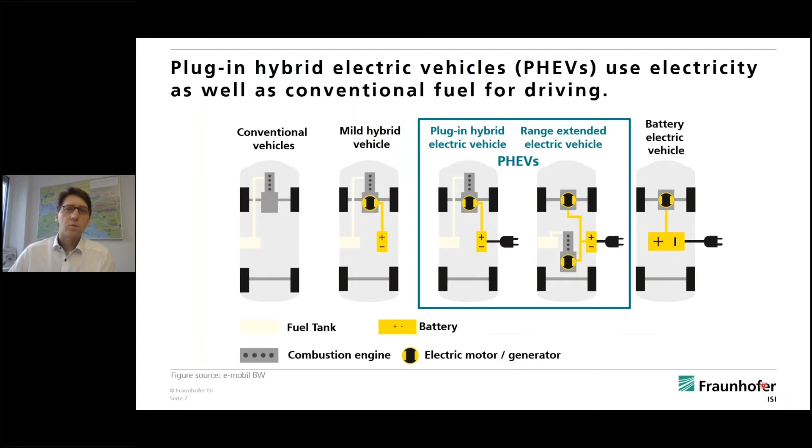What's the current status of plug-in hybrids in the world? Well, globally, there are now more than 2 million plug-in hybrid electric vehicles in stock worldwide, which is about 1/3 of the global electric vehicle stock at the end of 2019. The market shares in terms of sales are currently rising, particularly in Europe, where we have 3.5% in the first half of 2020, and 1.1% in China.

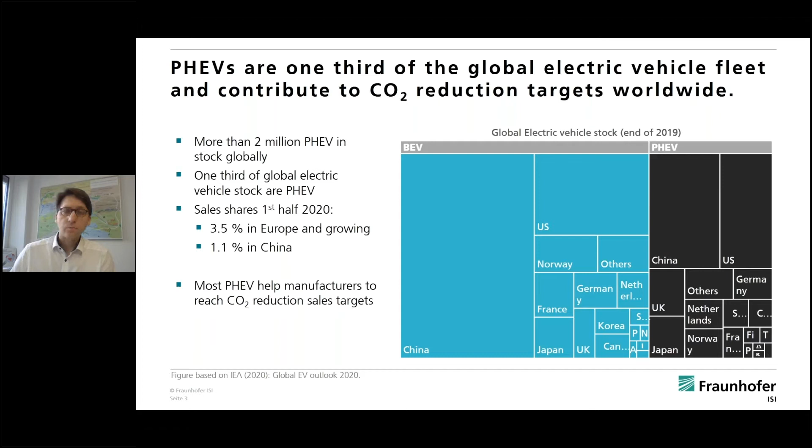Also, from a policy perspective, plug-in hybrids are very important for many car manufacturers because they help them to meet the CO2 reduction targets in Europe and elsewhere and help them to avoid penalty payments. For our study, we started with the assumption that plug-in hybrids actually can help to reduce greenhouse gas emissions in transport and also help to reduce local air pollution, but their actual potential very much depends on their real-world usage.

And just as Peter said, we have the feeling that there has been no systematic investigation of real-world PHEV usage so far, and also a systematic comparison to test cycle values has been missing. So the aim of the present study, which has been published just today, is to gain a better understanding of the real-world usage, including electric driving, CO2 emissions, but also annual mileage and so on, of plug-in hybrids in China, Europe, and North America. For Europe, we put a special emphasis on Germany, which is the largest PHEV market in Europe. And we also identified potential policy recommendations, which Peter will present later on.

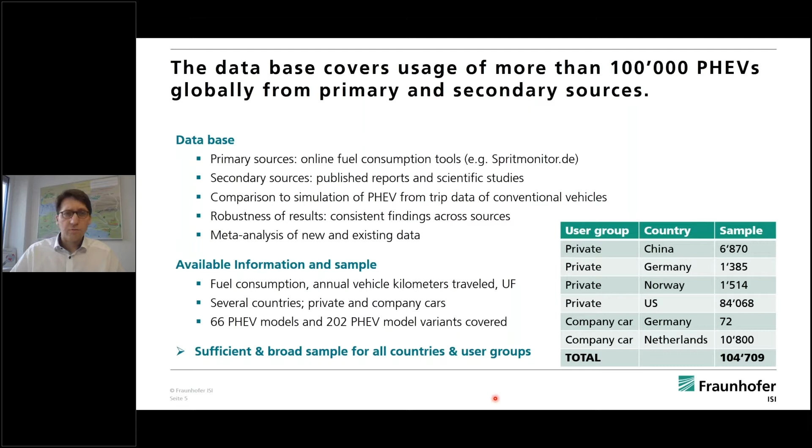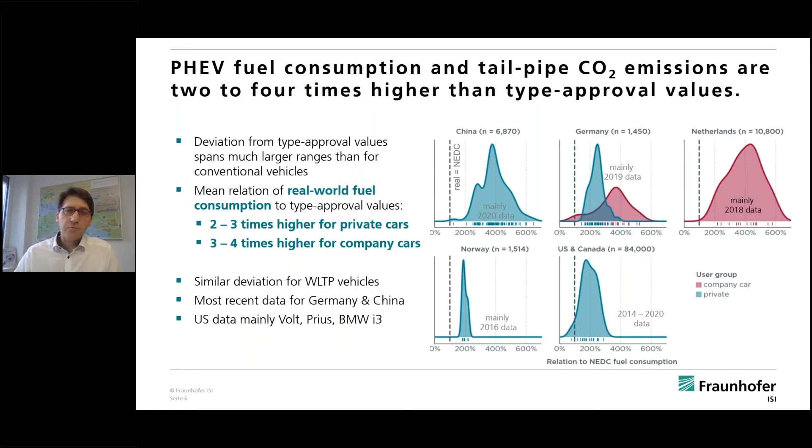Now, where do these huge deviations come from? And one of the main factors for these huge deviations is the electric driving share, the so-called utility factor, that is the portion of kilometers driven on electricity.

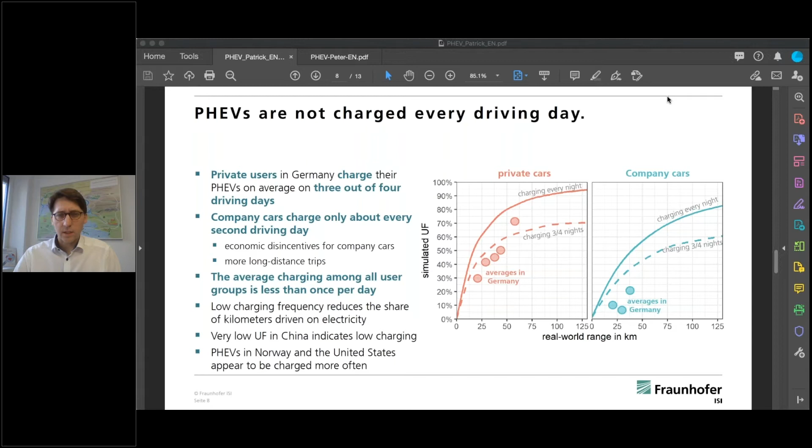So compared to usage of vehicles in the total fleet, including conventional vehicles, we see that plug-in hybrids as private vehicles drive much more than conventional vehicles in Germany. For the US, the annual mileage of PHEVs is somewhat similar to the national car average. Now, why is this higher annual mileage important? Higher annual mileage also means more frequent long-distance driving.

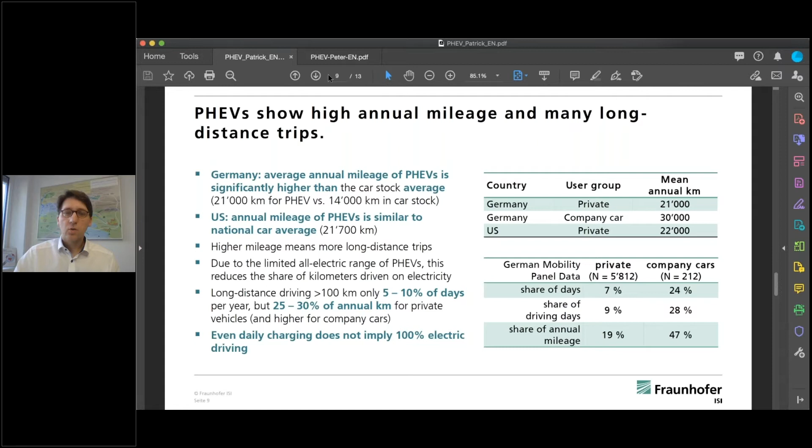And we made an analysis for driving of conventional vehicles in Germany and found that long-distance driving with more than 100 kilometers driven in one day took place on about 5 to 10% of days for privately owned vehicles, but makes up 1/5 to 1/4 of the total annual mileage. And the numbers are considerably higher for company cars. So that means these not so frequent long distance driving days make up only a small share of days per year, but they have considerable impact on the total annual mileage. That means for plug-in hybrids, even if you do a full recharge every night, this long distance driving clearly impacts your overall utility factor.

Now, when we combine the total annual mileage with the utility factors, we obtain the average annual electric kilometers. And we observe that current PHEVs mostly have a range of around 30 to 60 kilometers, and they will electrify between 5,000 and 10,000 kilometers. And the mean annual electric kilometers is clearly increasing with the all-electric range. However, long-range PHEVs, mainly range-extended vehicles, achieve even more. They achieve between 12,000 and 20,000 kilometers mean annual driving distance, which is already the same order of magnitude as the fleet average driving in these countries. So in total, that means that utility factors are often lower than expected, combined with above average annual mileage.

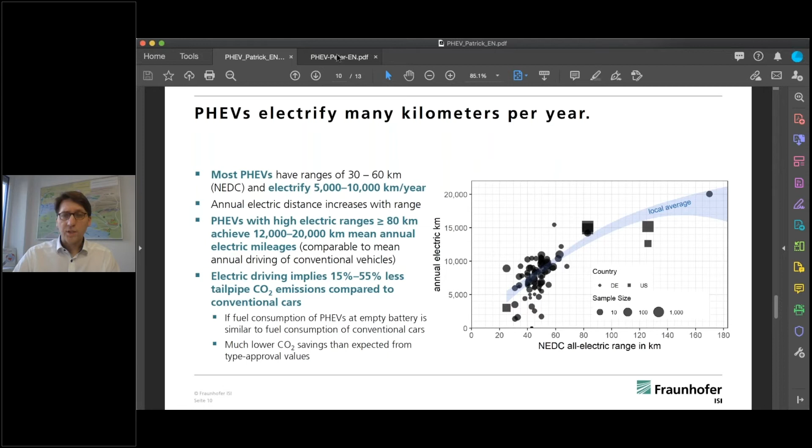This can still mean considerably high annual electric distance traveled. Taking together the electric driving share and the total kilometers driven, and only looking at tailpipe emissions, we're not doing an LCA analysis here. That means that due to this electric driving, plug-in hybrids show between 15 and 55% less tailpipe CO2 emissions compared to conventional vehicles. Well, this calculation assumes that PHEVs at empty battery have similar fuel consumption to conventional cars, but these values are still much lower in terms of CO2 savings than one would expect from type approval values.

Likewise, the mean share of electric driving, the so-called utility factor, increases by 3 to 5 percentage points with every 10 kilometers of all-electric range, and decreases by 1 to 3 percentage points with each 10 kilowatts of system power increase. So clearly, the vehicle properties impact real-world fuel consumption and CO2 emissions. Which brings me to the conclusions.

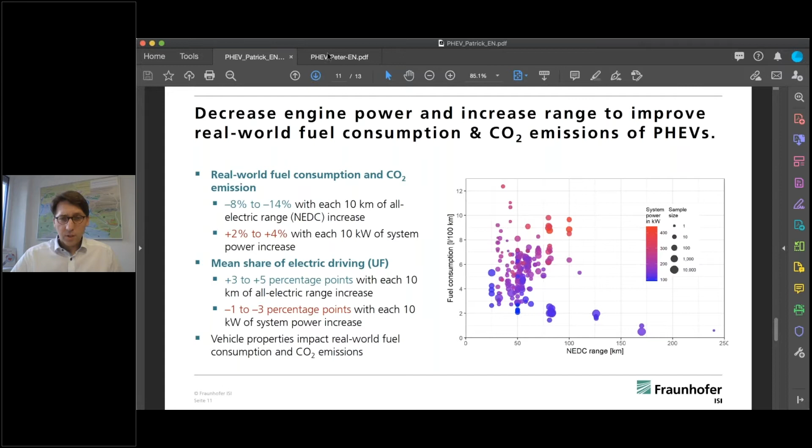So again, the background of the study was to analyze real-world usage of plug-in hybrids, and they actually can offer significant environmental benefits, but only if they are mainly driven on electricity. And we believe that the present study is the first large international and systematic study of real-world usage. Of course, to some extent, we used existing data from our other colleagues and organizations, but some of the data is also new. But I think a huge contribution here is also this kind of meta-analysis, putting all the data together and analyzing it in a coherent and systematic fashion.

So what we find is that PHEV fuel consumption and tailpipe CO2 emissions are 2 to 4 times higher than type approval values. The main reason for that is that the share of electric driving is only about half the share one would expect from type approval. And again, the low electric driving to a large extent stems from the fact that PHEVs are not charged every day. Another part of these low electric driving shares are the high annual mileage and frequent long distance trips performed by PHEVs. Yet, despite the low utility factors, PHEVs can electrify and do electrify many kilometers per year. And we also see in the actual data of the real-world fuel consumption that decreasing the engine power and increasing the electric range would improve real-world fuel consumption and CO2 emissions.

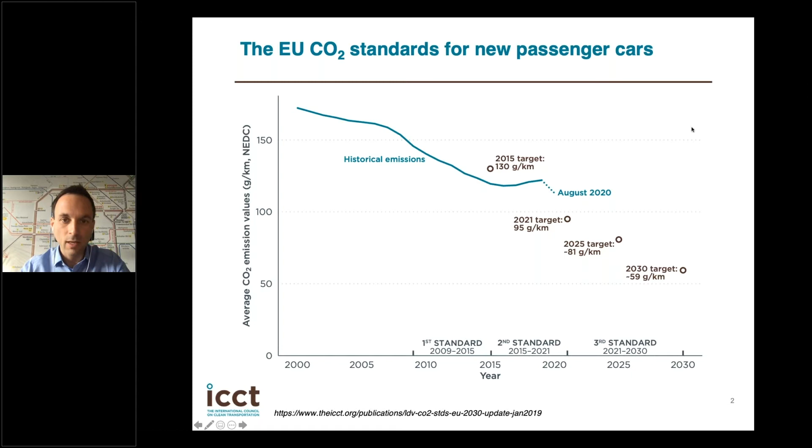More specifically for the plug-in hybrid vehicles, if we look at the system, it is like that. So until 2022, each vehicle below 50 grams per kilometer of CO2 qualifies for a super credit. So for those kind of vehicles, the manufacturers can count them several times. That applies for all the battery electric vehicles, fuel cell vehicles, but also for many plug-in hybrid vehicles.

From 2025 onwards, the methodology is a bit more complicated. We will see what the European Commission calls zero and low emission vehicles, ZLEV vehicles. And those ZLEV vehicles also qualify for a credit, but depending on the CO2 emission value. So it's not that if you're below 50 grams, you automatically get the full credit, but you only get a partial credit, and the lower the CO2 emissions are, the more credits you basically get.

However, what's the same in both of those systems is that the value of 50 grams per kilometer plays a very important role. And 50 grams per kilometer in a test cycle, as Patrick explained, means about twice to 4 times as much CO2 emission values in the real world, meaning that if the threshold is 50 grams per kilometer, in reality it can be up to 200 grams per kilometer.

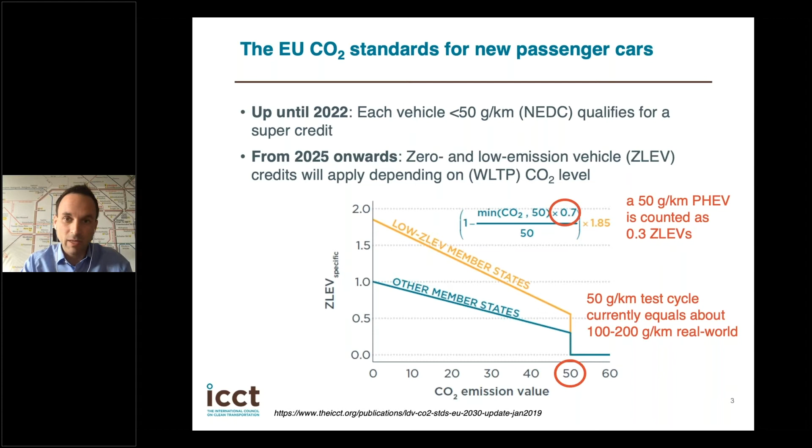So the challenge that we see with this is that plug-in hybrid vehicles with a relatively low electric range that may not be driven very much in electric mode still benefit from this current regulation. And so from this, we conclude for our recommendations at the European Union level that ideally the threshold for super credits should be lowered. This is the super credits in the first or the second phase until 2021. And from our perspective, the threshold should ideally be lowered from the current 50 grams per kilometer to be more in line with the real world CO2 emission values that we are seeing.

Then a bit more midterm is, in our opinion, the recommendation to also change the threshold for the ZLEV credits, which currently is 50 grams per kilometer. Also there, we think it should be lowered to be more in line with the real world values that we're seeing. And we think the multiplier, the 0.7 factor that I just mentioned, should be removed altogether because it leverages the effect for those vehicles with low electric range.

Maybe a bit more long-term, in our opinion, the qualification for super credits or ZLEV credits should ideally be demonstrated using real-world usage data. For example, using the onboard fuel consumption meter data that will be collected from this year onwards. Those consumption meters are mandatory in new vehicles, and the official authorities will collect plenty of data that eventually in the future could be used to check if those super credits and ZLEV credits really should apply for certain plug-in hybrid vehicle models.

And then also in parallel, we think it is very important to also modify the testing procedures. Patrick has explained that even in the WLTP, the utility factor assumptions are too optimistic given the real-world usage data that we are seeing, and those factors should be updated.

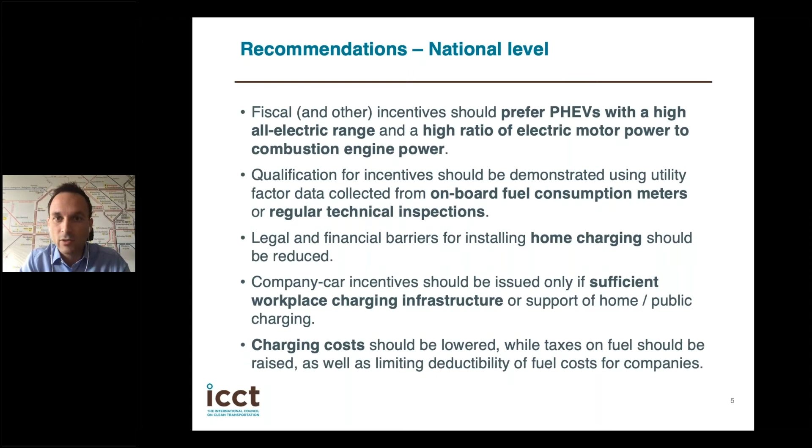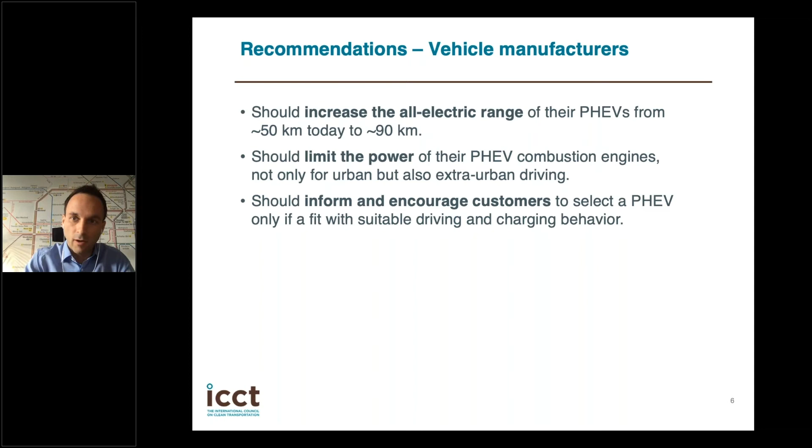So to summarize the recommendations, plug-in hybrid vehicles can electrify many kilometers. So the one important objective that we want to bring across with this study is that plug-in hybrid vehicles can be an important part of the puzzle, reducing emissions in the transport sector. They can electrify many kilometers if they have high electric ranges and if they are driven mostly on electricity.

However, we think that the current policies do not fully support these aspects, and they should be revised accordingly. So in other words, if manufacturers, if politicians really change the framework conditions, we think that plug-in hybrid vehicles can be driven differently and can really be a good technology that also contributes to CO2 reduction.